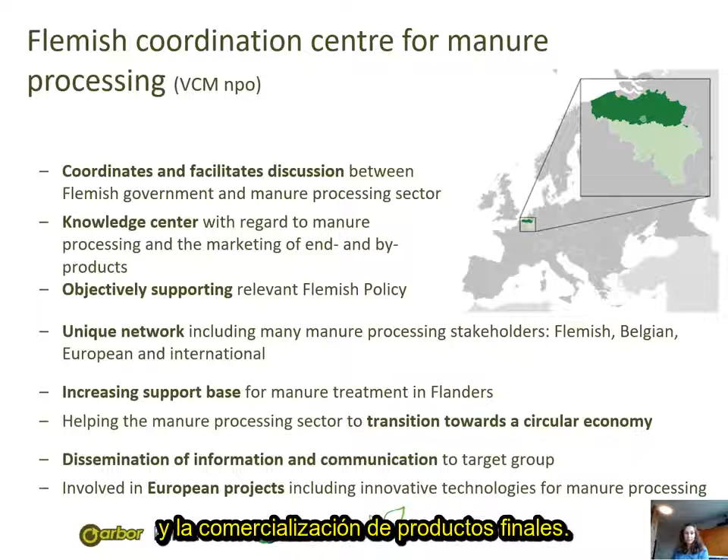A few words about our organization. We are located in Belgium, in the northern part of Belgium, Flanders, which you can see on the map. We try to coordinate between the Flemish government and the manure processing sector because we have a lot of manure in Flanders. On a small surface, you can imagine that this brings along some problems. We want to be a knowledge center with regard to manure processing and marketing of the end products. And we try to objectively support the Flemish policies around this.

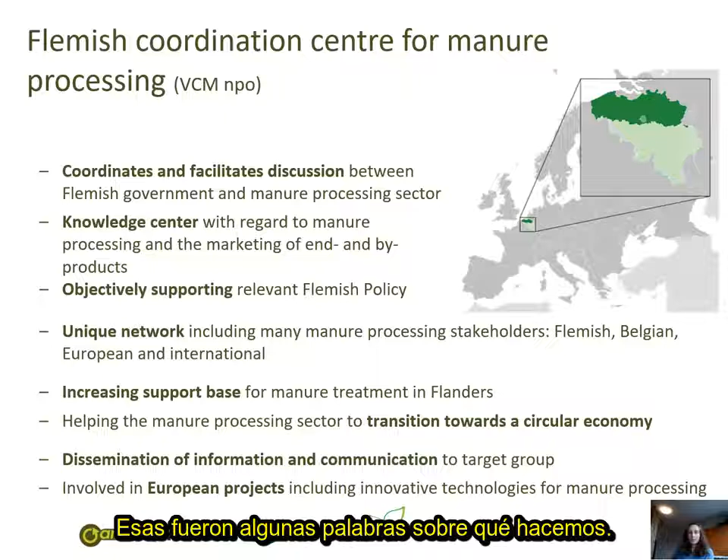We have a unique network of stakeholders in the whole of Europe, and we also hope to increase the supporting base for manure treatment in Flanders by helping the manure processing sector transition to a more sustainable and circular economy. That's why we try to disseminate as much information and communication as possible to our target group of farmers and manure processors. We are also involved in European projects, like SYSTEMIC, because we are looking at how to be a sustainable and advanced circular economy in our sector. So this is a small word about what our organization does.

Now, we also organize an international conference on manure management and valorization, which many times includes anaerobic digestion because it can also be seen as a form of processing manure. Not really processing, but treating manure and trying to recover energy from manure.

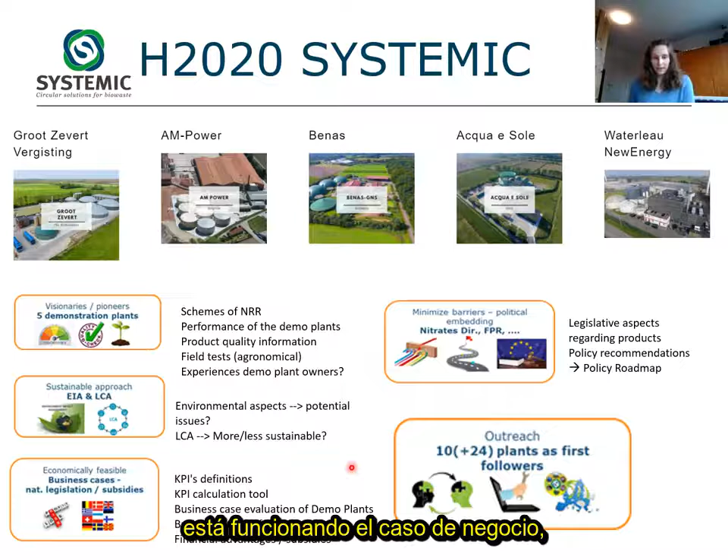So we focused on these 5 big plants in different regions, and for these plants we were studying the whole schemes of nutrient recovery that they have installed. These 5 plants have installed nutrient recovery technologies for digestate. We have been doing mass balances and energy balances for those 5 plants, also LCAs, so life cycle assessments. We have been trying to figure out how their business case is working, and also to see what the policy and legislative barriers are in the region, but also in the whole of Europe.

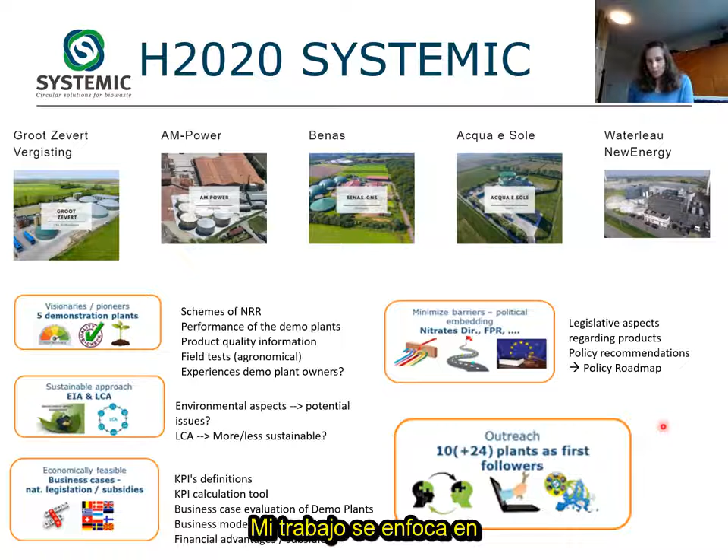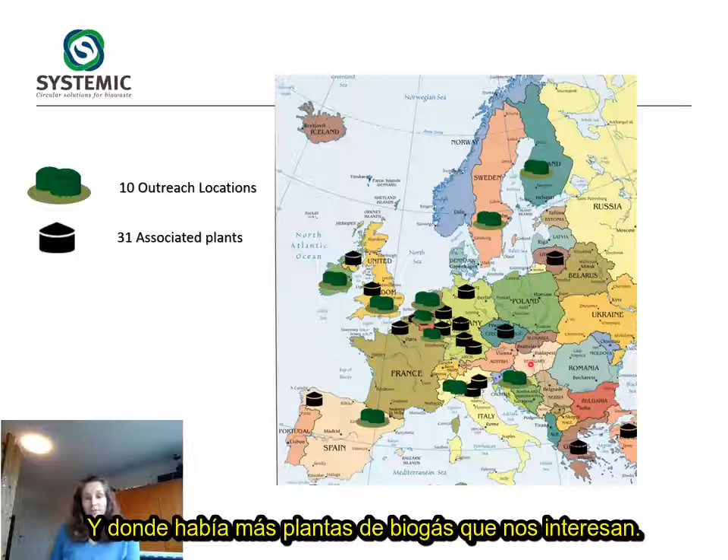My work package was focusing on transferring the technologies that they have implemented to more biogas plants in Europe. And how do we do that effectively? So we gathered 10 extra biogas plants that were very interested in the technologies to recover nutrients and water from digestate. These would be our outreach locations to which we would like to transfer our experience and knowledge. And then there were even more biogas plants that were also interested. So these were like our first followers.

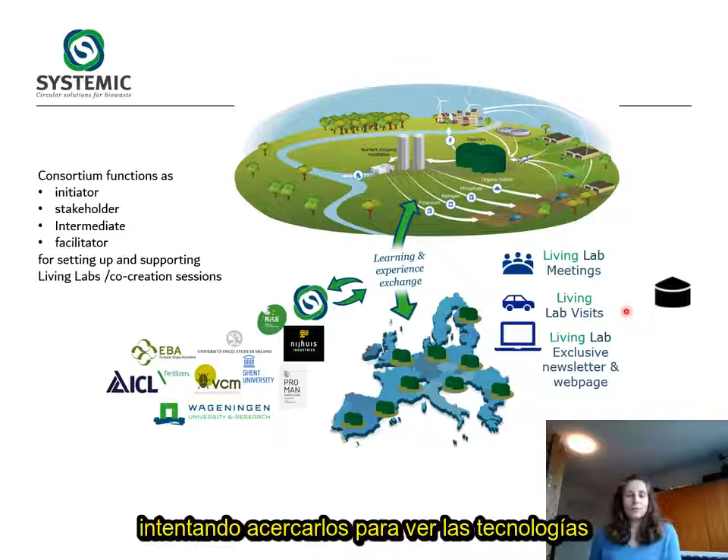The idea was that the SYSTEMIC consortium of partners would function as an initiator, a stakeholder, but also an intermediary or facilitator supporting this learning experience and exchange about nutrient recovery from digestates. How did we do that? We set up living lab meetings, which were meetings with all the biogas plant owners discussing these technologies and their experiences with them, trying to get them to visit each other to really see the technologies, and then having a digital part where they could also find all information. So that's about SYSTEMIC for now.

What I learned about the situation in Argentina from the DIVICO project is that there were about 100 biogas plants in 2015. Most of them were there because of environmental aspects, and only a small part was there because of the energy production they could get from anaerobic digestion. Most of them are small scale, and they mainly process industrial waste, organic waste, or biomass.

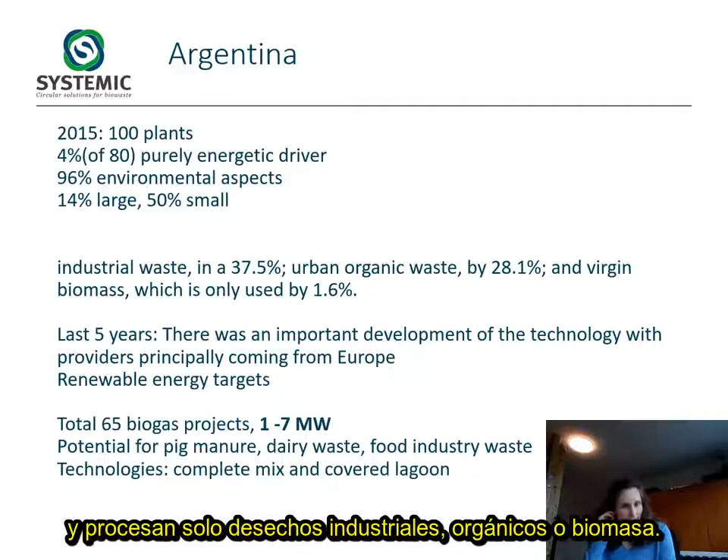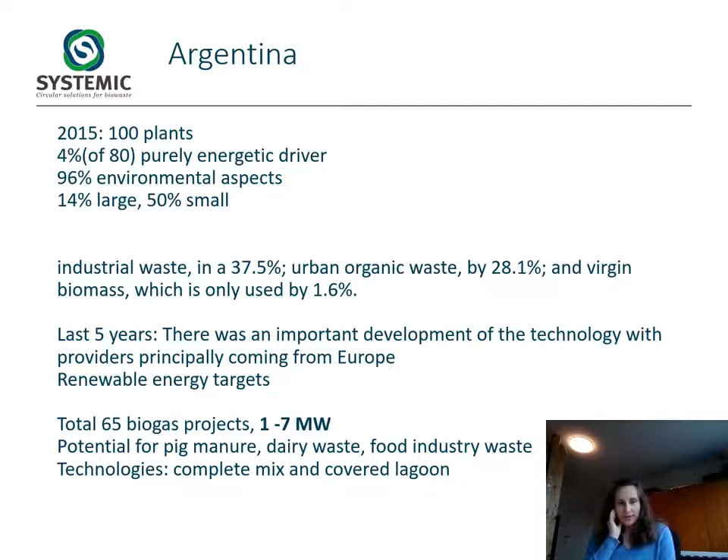But in the last few years, apparently, there was an important development in technology providers from Europe, and new renewable energy targets were set, so the biogas sector was more stimulated. And they have seen new biogas projects coming up in Argentina, large biogas projects with 1 to 7 megawatts production capacity.

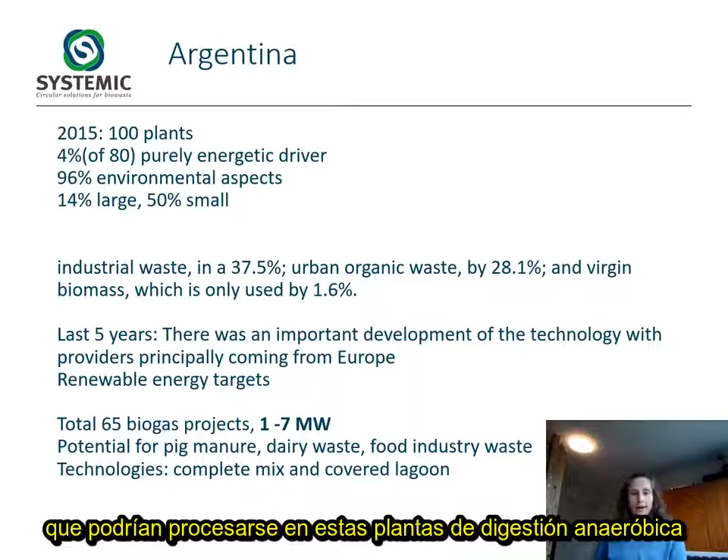And there is also a potential for the feedstocks, like there is enough pig manure, there is enough dairy waste or food industry waste that could be processed in these anaerobic digestion plants and valorized in the form of energy. However, the current technologies for digestate treatment are just complete mixing or just store it in covered lagoon and apply it on land.

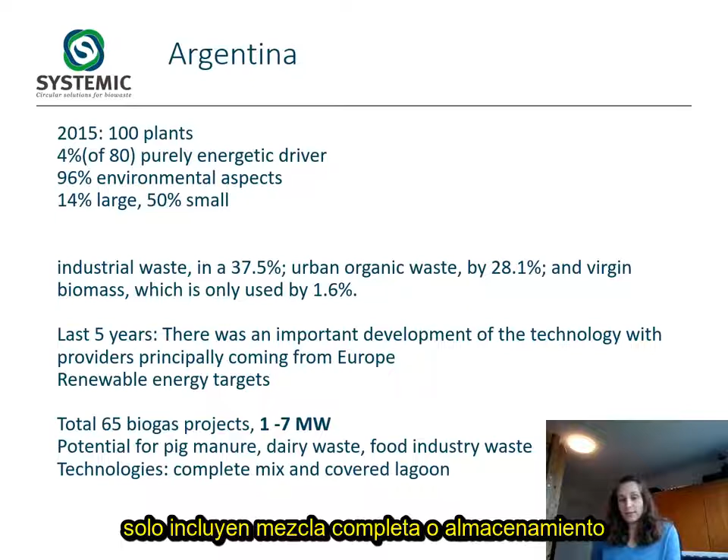Now, what are the problems or the conditions in Argentina? There is enough land, so we cannot really compare it to Europe, where we have very lower surface to spread all the digestates. In Argentina, there's no problem. There is enough land and there are no restrictions on nutrient surpluses in the soils, which is of course a good thing. However, there is a question about how to apply digestates.

Application methods cannot compact the soil, or there should be no tillage. It would also be beneficial if there could be a reduction of emissions of NOx and ammonia while applying the digestate as a fertilizer. And also reducing transport cost is an important factor, because when you're working with digestate, this is like a liquid product. You don't want to transport it too far, because transporting water is just a waste of money.

And also there could be in the near future or in the further future a potential market which could bring revenues, a potential market for like specific organic fertilizers made from digestate or for digestate as such. So this needs to be further developed first. Then there is a question about using separated digestate as bedding material for cows, and if the heat from the CHP could be optimally valorized. So these are all things we need to take into account when looking to the biogas sector in Argentina and trying to implement technologies for digestate processing.

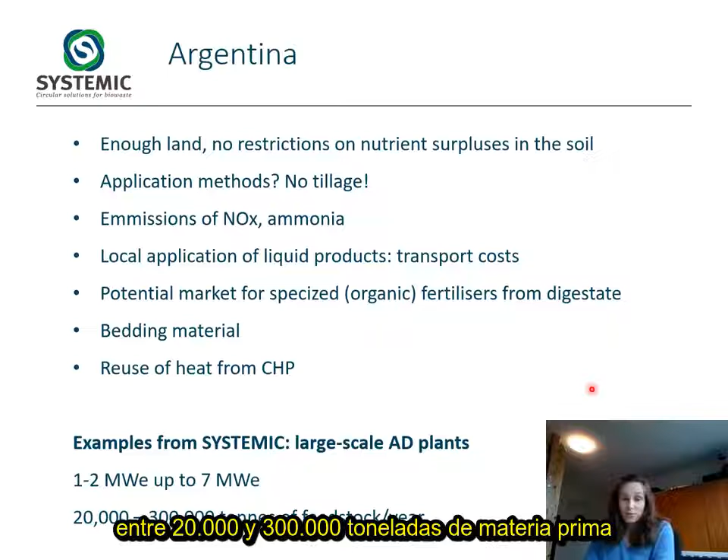I will now try to give you some examples we have from the SYSTEMIC project, which is on European scale and on European level. Maybe not everything is comparable to Argentina. However, the idea is just to give you some inspiration on what is possible. So in Europe, and in the SYSTEMIC project specifically, we have studied large-scale anaerobic digestion plants. Most of them were from 1 to 2 megawatts electricity production capacity, and there are even some higher that could produce up to 7 megawatts electricity. This translates roughly to 20,000 to 300,000 tons of feedstock going into the anaerobic digester per year. So then you have more or less an idea of what I mean with large-scale anaerobic digestion plants.

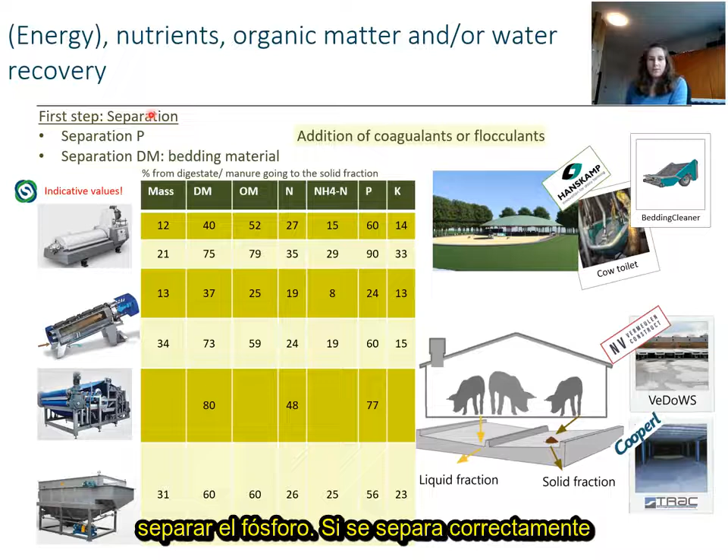Now, the first step to recover energy or nutrients, organic matter, and water from digestate is separation. Because then you separate the water fraction from the solid, the dry mass. And an advantage is you can also separate phosphorus. If you efficiently can separate dry matter like fibers, you can use this as a bedding material. At least in Europe, it can be used under the condition that it is pasteurized, which means that it stays 1 hour at 70 degrees.

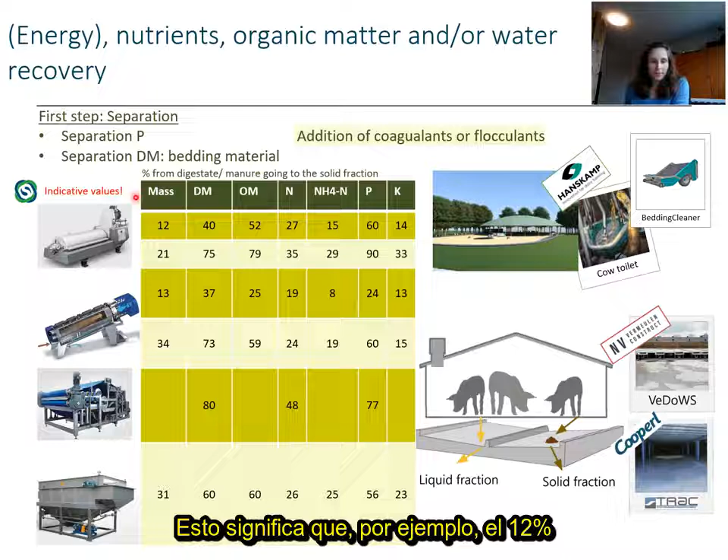So these are some indicative values of what different separation technologies can do for digestates. First thing you see here is the decanter centrifuge, which is mainly used for digestates in Europe. And these values are separation efficiency going to the solid fraction. This means, for example, 12% of the mass of the initial digestate is going to solid fraction. And here you have dry matter, organic matter, total nitrogen, ammonia nitrogen, phosphorus, and potassium.

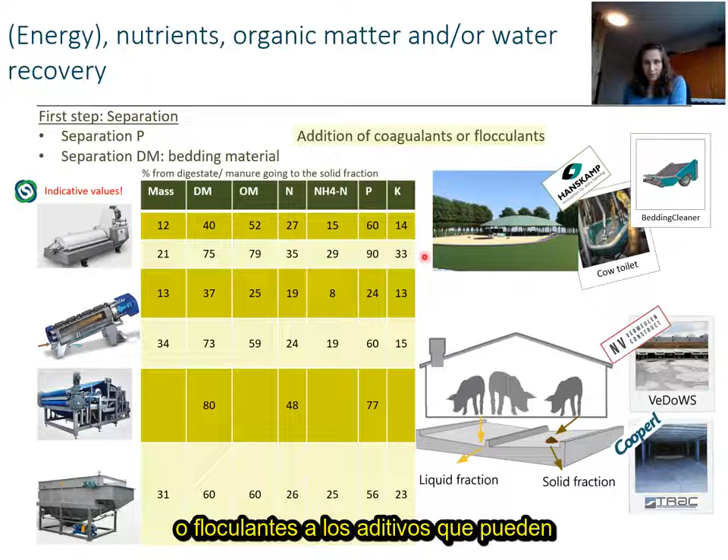The other column is the efficiency you get when you add coagulants or flocculants, which are additives that could help or support your separation. In Flanders or in Europe, in certain regions, it's important that you try to recover the phosphorus in the solid fraction, and therefore you see here that you would like to have as much phosphorus in the solid fraction as possible. Therefore, applying coagulants or flocculants can really help you with that.

The second one is a screw press, which is more used on, for example, more fibrous digestates or cattle manure, because it works better when there's more dry matter. This is mainly used, for example, for making bedding material for cows.

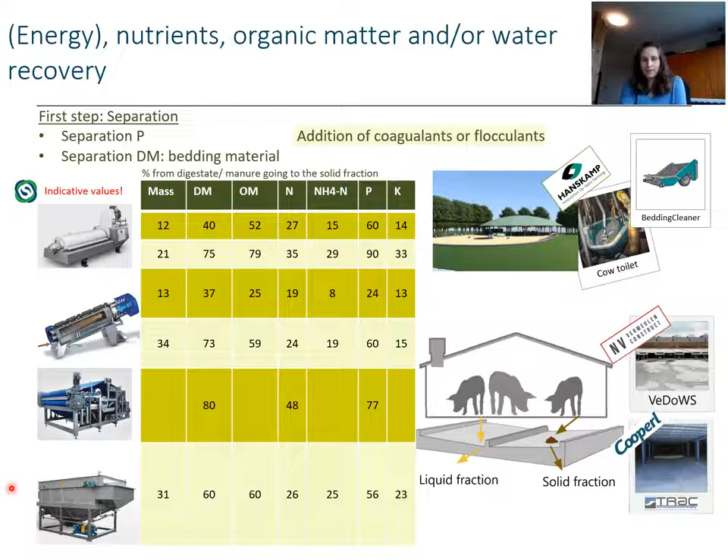Then you have a belt separator, which are belts moving along a row of rollers, and they are pressing the liquid out. This is also always used with coagulants. And then there is a DAF, a dissolved air flotation unit, which is more like the second step of separation. It's to get out more of the solids if you want to go further in purifying your digestate. So it's not like it's the first step. You can have, for example, a centrifuge and a DAF, and then a further treatment cascade.

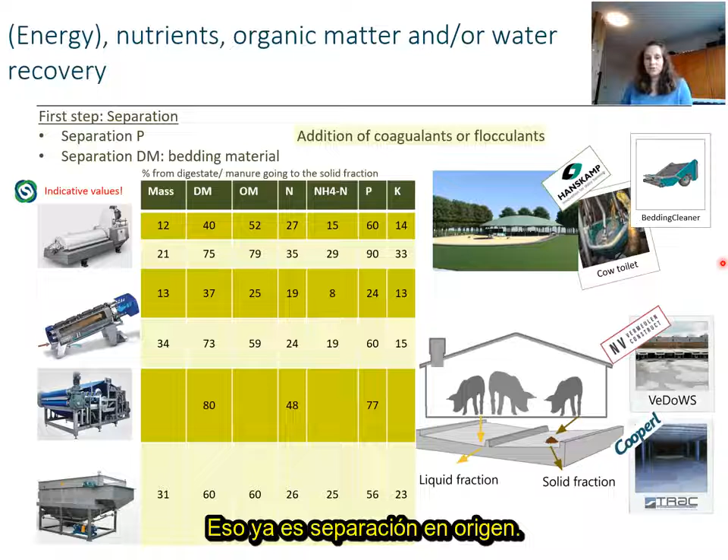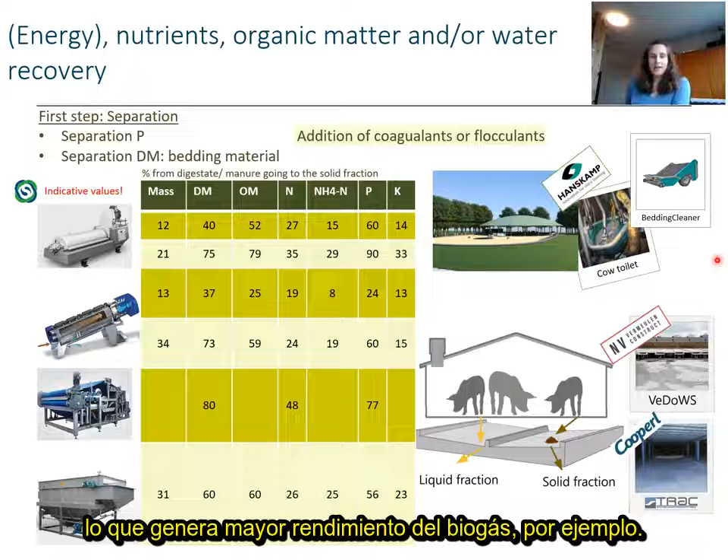These things here on the right are some specialties. This is separation in the stables already of manure, so it's even before anaerobic digestion. It's to separate the urine from the feces of the animals so that it's already at source separation. This can help with improved anaerobic digestion, for example, because then you only put the solid fraction in your digester, which gives you better biogas yield, for example. But these are very specific stable systems, of course.

Now, a small overview of what I just mentioned in my slide about which things should be taken into account for the products that are coming out of the separation technologies. We call it solid fraction and liquid fraction. Okay, if you would see the separation technology, is it complex? No, it's relatively easy to operate and to maintain. It's just a screw, or a decanter centrifuge is just a tumbling chamber. So it's relatively low in complexity.

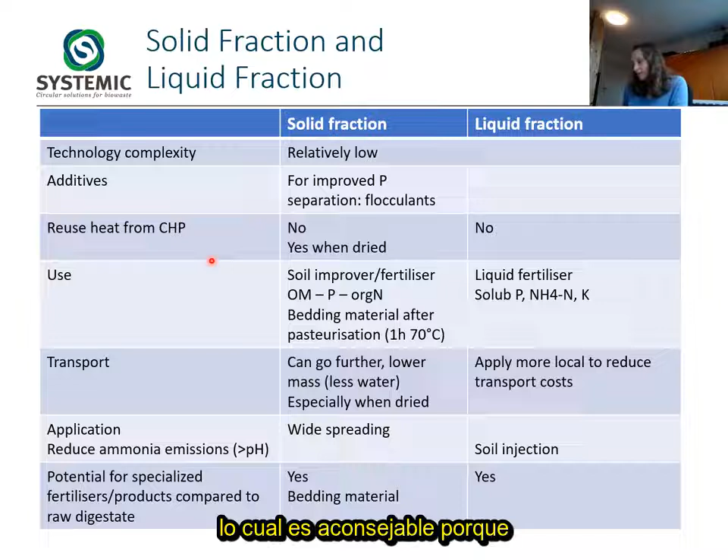You can use additives, like I mentioned, for improved phosphorus separation, for example, but it also counts for an extra cost, obviously. And you add chemicals to your digestate, which is also not always wanted. Can you reuse heat from the CHP? No, not for the system itself, because it doesn't require heat. It can when you want to dry your solid fraction after, which is advised because then you lower the volume or the mass even more of your solid fraction, and then you get a dry product up to even 90% dry matter, which is really, really dry, and it can be spread very easily. So drying can be interesting, and you can reuse the heat.

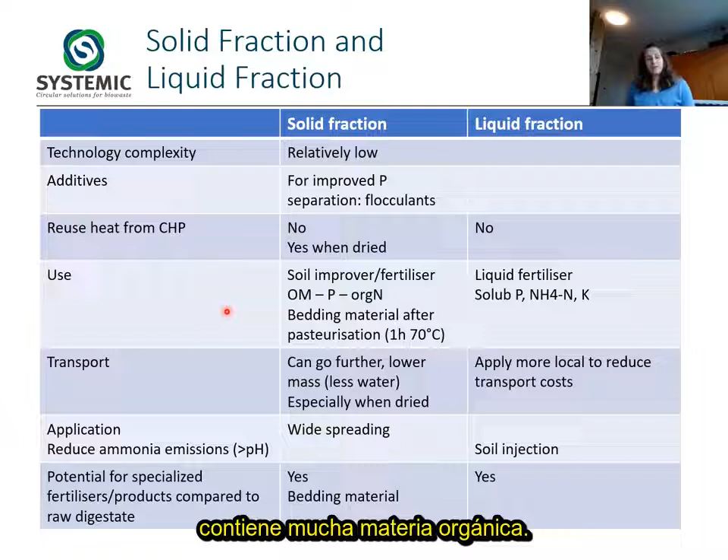How do you use these products, solid fraction and liquid fraction? The solid fraction can be used as a soil improver, for example, or fertilizer, because it still contains a lot of organic matter. Almost all the organic matter goes to the solid fraction. All the phosphorus is also linked to the organic matter, let's say the main part of the phosphorus, and organic nitrogen also stays in the solid fraction. Like I said, solid fraction can be used as bedding material, but after pasteurization, then it's rather safe to be used as bedding material for cows.

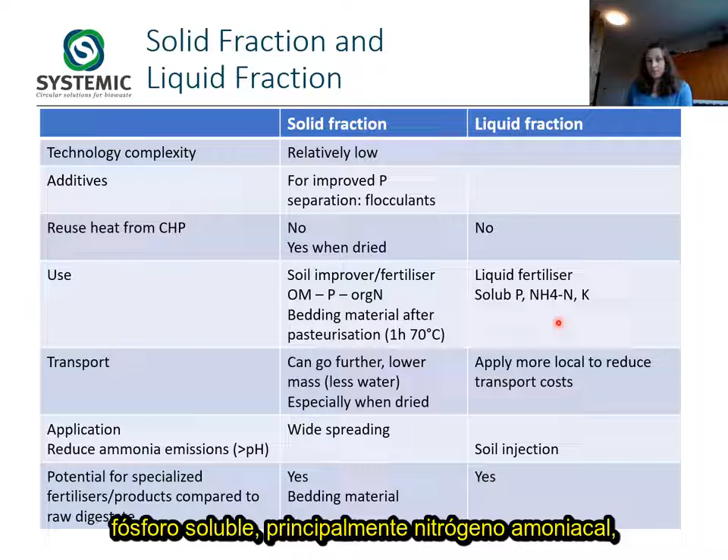Then the liquid fraction, it is a liquid fertilizer. It contains still a lot of nutrients and organic matter, soluble phosphorus, mainly the ammonia nitrogen, and potassium and other dissolved elements. So it's a good fertilizer, and it has an effect on, for example, here the transport. The solid fraction, you can obviously go further with it because it has a lower mass. It's also drier, so you can drive it away further at lower costs. Liquid fraction would be advised to apply more locally because transporting water is just an extra cost.

Application. When it's a dry product, you can just spread it widely with a normal spreader. For liquid fraction, it's advised to do soil injection because then you really reduce the possible ammonia emissions coming from the liquid fraction.

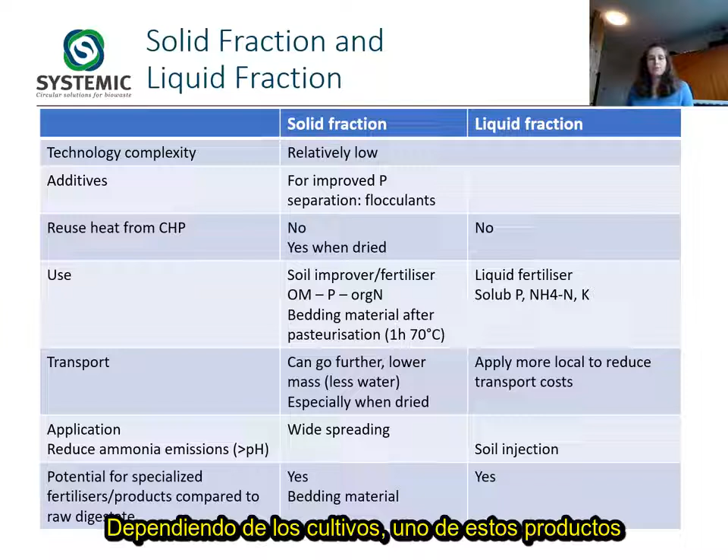Is there a potential for specialized fertilizers from these products compared to raw digestate? Yes, because here you have more or less concentrated nutrients in the solid fraction, meaning phosphorus is concentrated, organic nitrogen is concentrated, and organic matter. So this is a very nice product compared to digestate because it doesn't have that volatile ammonia, or not much, and the liquid fraction is the opposite. It has this readily available nitrogen in a liquid. So depending on the crops you're cultivating, one of the two products could be even more interesting than raw digestate.

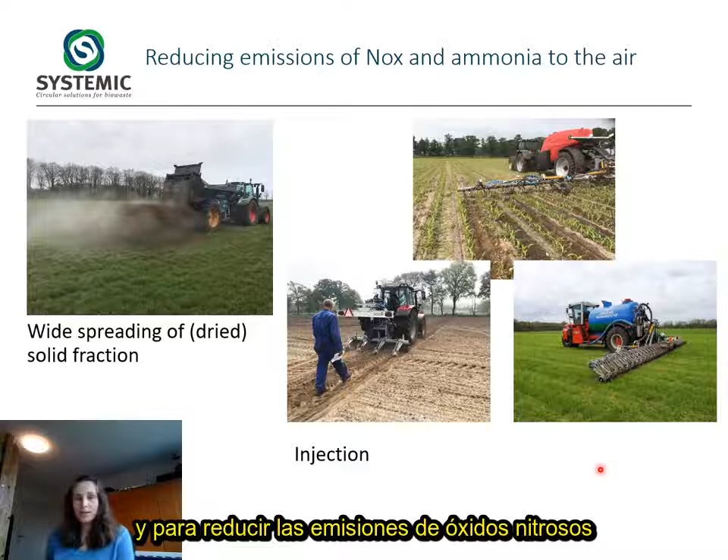Something about application technologies. This is a picture of wide spreading of dried solid fraction. For example, injection technologies. These are different types of machines that are used in Europe to inject liquids into the soil for crop cultivation and to reduce NOx and ammonia emissions to the air.

Afterwards, they have membrane filtration units, microfiltration, and reverse osmosis. And then they have an ion exchanger to really purify the water into clean water that can be discharged. What is coming out is a concentrate. They call it concentrate, but it's actually not really concentrated. It's a liquid with mainly all the nutrients in it.

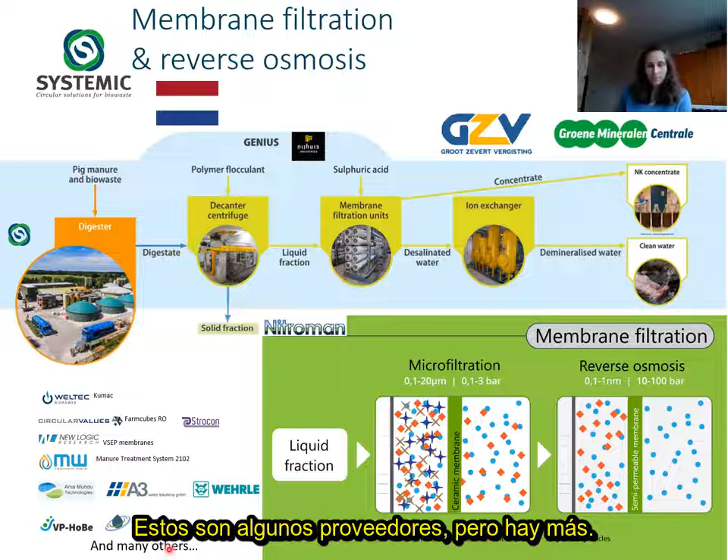Here you see a scheme of what the membranes do. So they just keep all the macromolecules and salts, retain them, and only the purified water goes out. These are some suppliers, but of course there are many more.

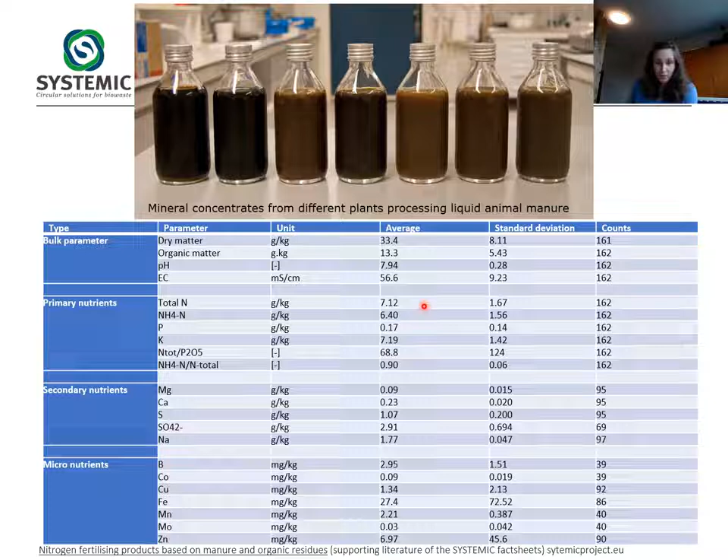And this is a rough estimation of the composition of the mineral concentrates. That's how they call it, but let's call it the RO, the reverse osmosis concentrate. You can see that the pH is rather high, up to 8. And I call it concentrate, but it's not really concentrated because, for example, the nitrogen content is only 7 grams per kilogram. So it's like a very diluted nutrient solution, let's say.

Pros and cons of the different products. The technology complexity. I'm talking now about the whole cascade, microfiltration, reverse osmosis, and ion exchange after each other. It's quite complex to operate, and it's also really sensitive, especially the reverse osmosis unit. You cannot go to it with a high dry matter content, otherwise it just clogs, and then you have to replace the membranes, which is an additional cost.

So you have to have staff that's really experienced, that needs to get the feeling how these technologies are working and what can disturb them. You have to have a stable process also in your digester, because fluctuations can really foul the membranes, for example. And therefore an advanced pre-treatment is needed.

And I'm thinking here about a very good first step. Like I mentioned, the separation should be very robust. You would have a constant end product. So the liquid fraction after separation, which is going into your membranes, should be rather constant of composition to have no problems in later steps. So this has an impact on maintenance and operational costs, as you can imagine.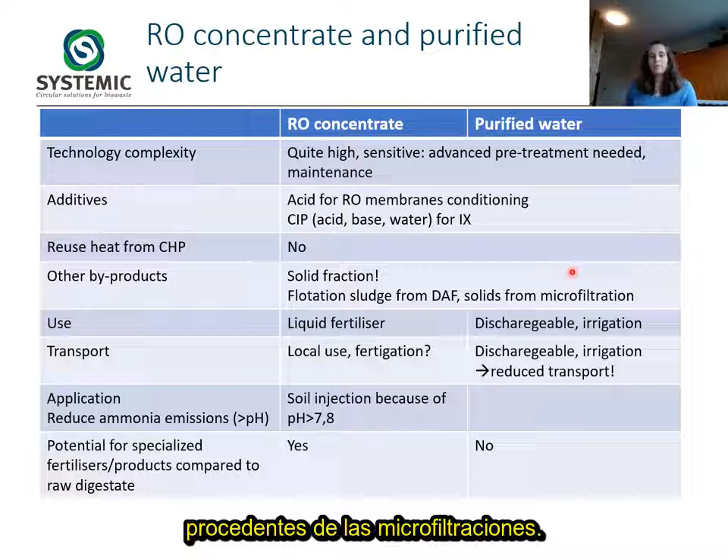You can recirculate it back to the digester, or you can mix it with your solid fraction, but you still need to do something with it. And then there's a certain amount of solids coming from your microfiltration too. So be aware that these are not the only two products that are coming out of this cascade.

On the other hand, what can you do with this product? The reverse osmosis concentrate can be used as a liquid fertilizer because, like I said, it contains all the nutrients and water. And then the purified water, it is dischargeable, or you can use it as irrigation water. And as you can imagine, the RO concentrate has a much lower volume than the initial digestate, so you win in volume. It's maximally reduced and it's concentrated in a much smaller form. However, it's still a liquid.

So for transport, because it's a liquid, try to use it locally or as fertigation as much as possible. And the purified water, you can discharge it or also use it as irrigation water. This will, like I said, give you reduced transport costs compared to if you would have raw digestate.

How to apply this? The reverse osmosis concentrate needs to be applied with soil injection because, like I said, it has a higher pH which can volatilize the ammonia again, and then you have ammonia emissions. So reduce that, don't go wide-spreading everything or all the ammonia is just lost in the air. You get burning of the plants, etc.

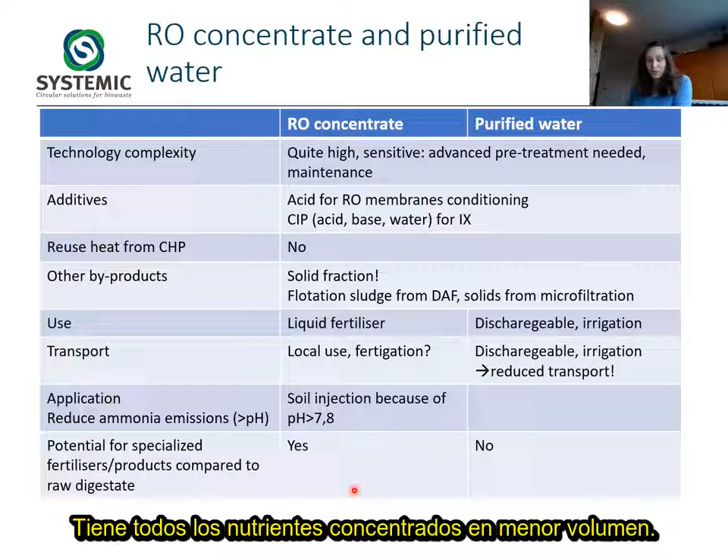Is there potential for specialized fertilizers? Yes, this is very much a different product than raw digestate. It's a more clear liquid. It has all nutrients concentrated in a smaller volume. So it is definitely a different product than digestate, which could be tailored to the needs of specific crops, for example.

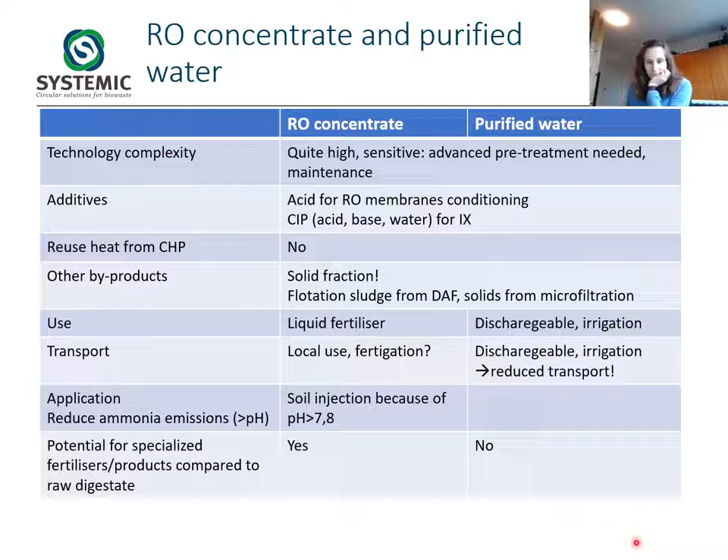Then there's ammonia stripping scrubbing technology, which might not be interesting for Argentina, but I can still mention it. It's a technology to get nitrogen out of the digestates or out of nitrogen-rich gas, like stable air, for example. What you do is you try to get ammonia in liquid or in gas into ammonia gas form, and this ammonia gas you then try to scrub away with acids and capture it in the liquid. The end product is an ammonium salt solution, and then you have a clean stream of air or liquid, relatively free from nitrogen, ammonia.

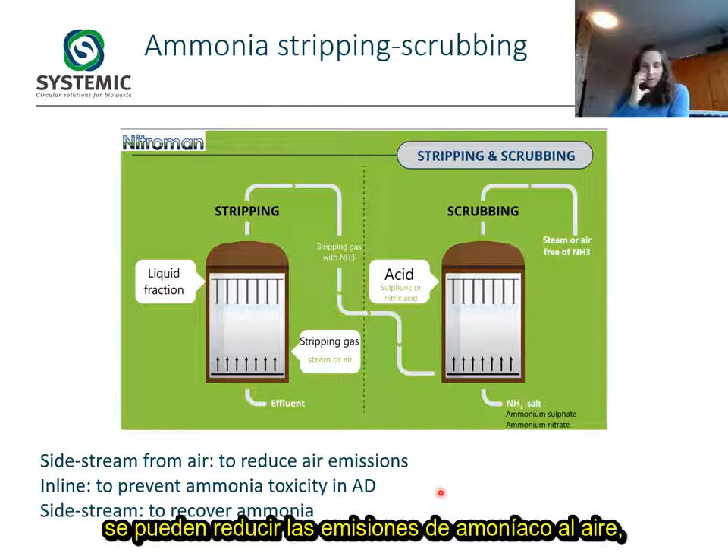These are different configurations that you can have. You can have side stream from air. So if you have nitrogen-rich loaded air, you can reduce ammonia emissions to the air by first scrubbing the ammonia out of the air. You can also put a scrubbing installation inline with your digester. This is mainly done if there are high amounts of ammonia in the digester because of the use of, for example, poultry manure. This brings toxicity in the digester and reduces the biogas yields. Therefore, if you strip and then recirculate the stripped digestate, you can have a higher biogas potential.

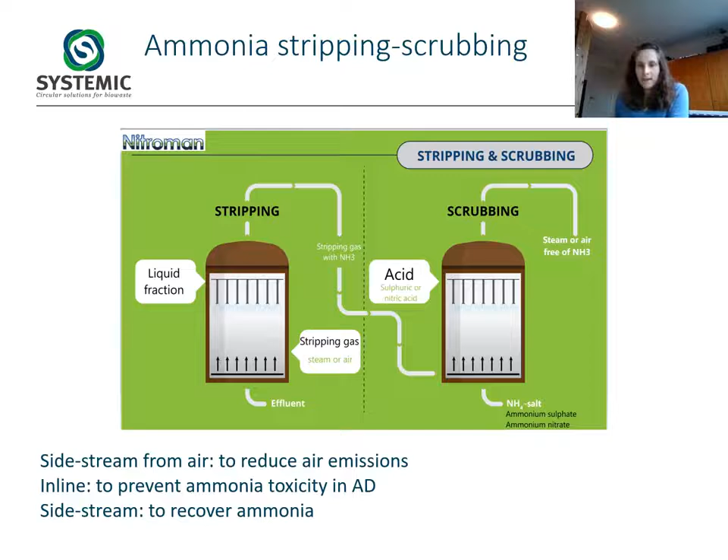And then there is also just side stream stripping, which means you take your digestate and you strip the ammonia from the digestate, and then you have a digestate low in ammonia and a scrubber salt solution. So that's just a way to recover the ammonia in a different kind of solution. I'll go a bit deeper into this. For example, this case here in Italy has an inline stripping scrubbing because they are using sewage sludge with high ammonia levels. It brought toxicity in their digester. They have a stripper here and they recirculate the stripped digestate back, and then they have higher biogas yields.

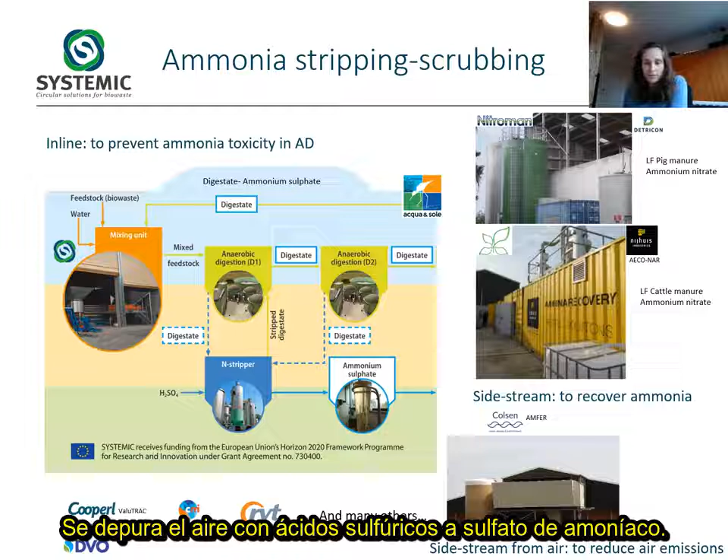These are two installations. One is here on the liquid fraction of raw pig manure, and they scrub the ammonia with nitric acid, which then produces an ammonium nitrate solution, and stripped pig manure. Same was tried for cattle manure. It was more difficult because there were more pre-treatment steps necessary. And then there is something that's done very frequently in Europe, which is air washing, meaning the air from the stables of the cows or the pigs is washed with more or less the same system so that there is no ammonia emission from the stables to the outside air. So there the air is scrubbed with sulfuric acid to an ammonium sulfate solution.

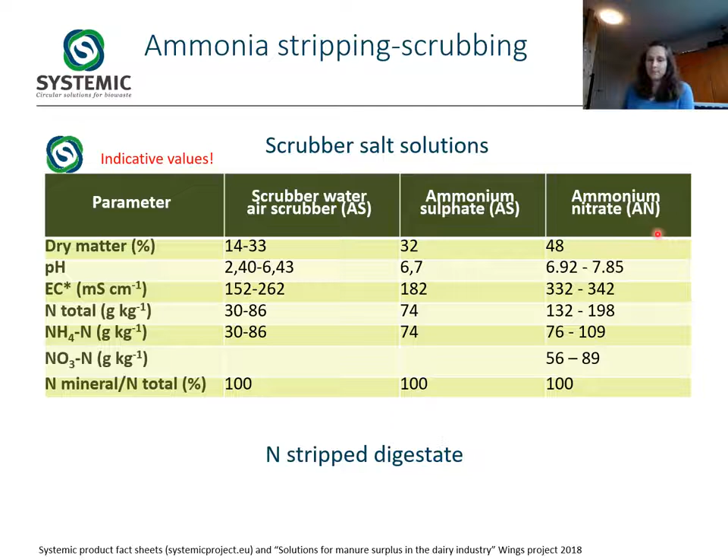Here are some indicative values of how these scrubber salt solutions look. If you have scrubber salt from an air washing system, these are the compositions. You can see that the pH is rather low and that the nitrogen is about 3 to 8% of the solution. If you have ammonium sulfate from raw digestates, more or less the same concentration. However, the pH can be a bit higher. Ammonium nitrate also the same, but you have higher nitrogen levels because you, of course, have ammonium nitrate. So you have twice the nitrogen here. You have also sulfur. The other product you get is nitrogen stripped digestate, so digestate with a low amount of nitrogen in it.

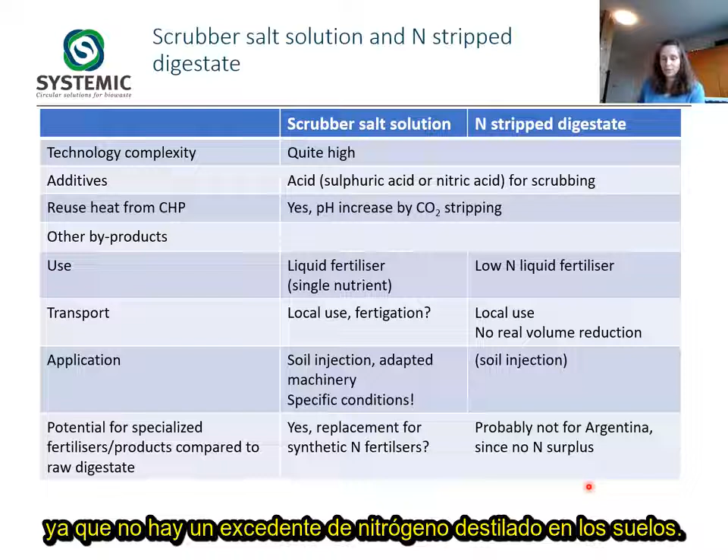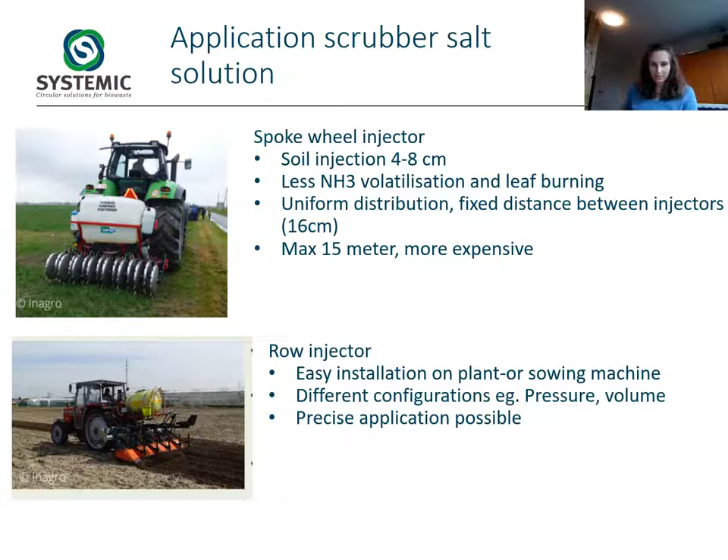These are some different technologies or machineries to apply the scrubber salt solutions. I'm not going to read this because I'm not really an expert on application machinery, but these are some things they used in Europe. Spoke wheel injection, row injector, and here you have trail hoses, drag hoses, which is

no injection. These are conditions you have to watch out with when you are spraying the ammonia scrubber salt solution. Because if you use it as a leaf fertilizer, you have to really watch out what you're doing because of the acid pH and the possibility of the volatilization of ammonia. You can have leaf burning, except under certain conditions when you can use it.

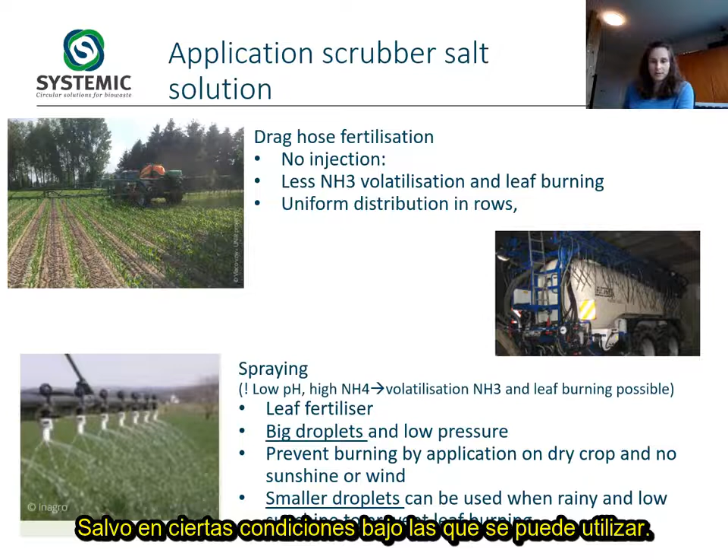There's a special system in Germany that does ammonia stripping without any use of acids. They use recovered gypsum, and this is their cascade. However, there's only one plant really operational now. The special thing here is that from the stripped digestate, they separate fibers and they make cardboard, paper from it. But therefore you need to have a very specific feedstock, with a lot of fibers, like with grass and chicken manure.

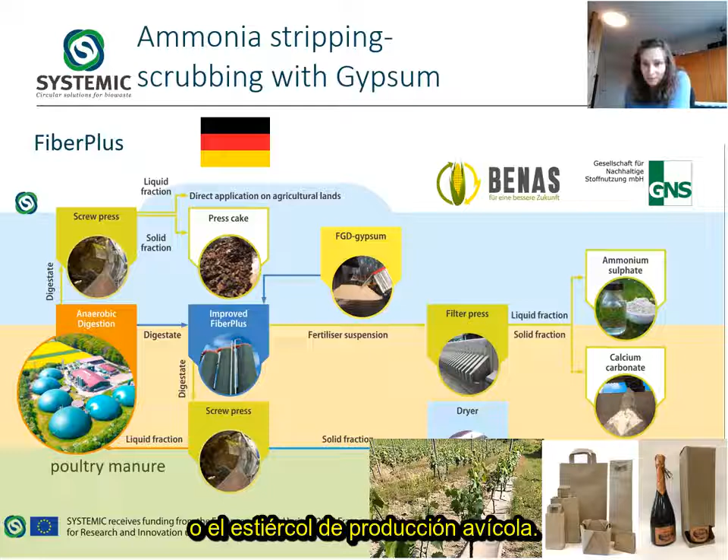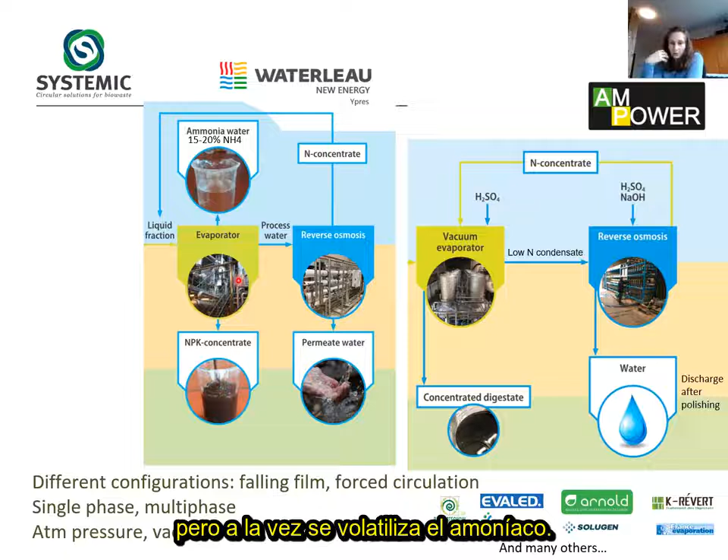Then the final thing I want to talk about is evaporation technology. It's also a way to reduce the volume of the digestates, and there are two ways you can do this. First of all, you have an evaporator, and if you just put in there liquid fraction of digestates, it evaporates water, but ammonia also volatilizes, so you get an ammonia water solution when it condenses, and a concentrate of all the other nutrients and organic matter.

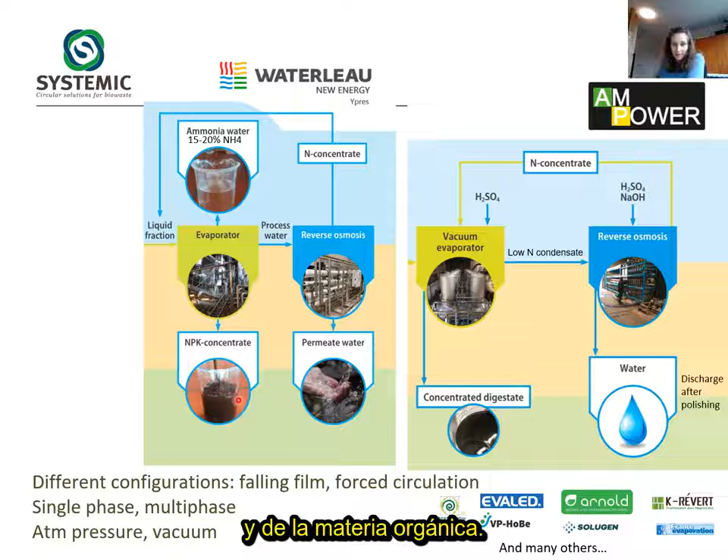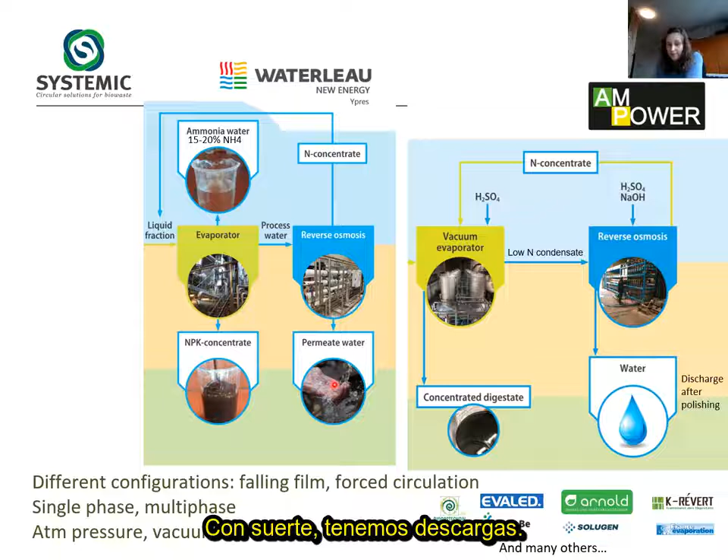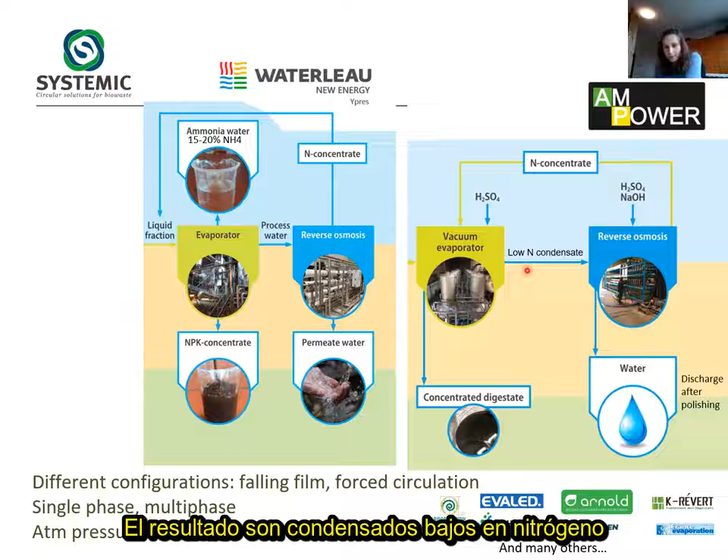So like you see here, you get ammonia water of 15 to 20% of nitrogen ammonia. And then you have processed water, which you can purify further and hopefully discharge. So you have the reduction of volume there. Another way, if you want to keep the ammonia in your concentrate, is just add some acid, and then everything is in the concentrated digestate. And what comes out is a very low nitrogen condensate, which you can further purify and discharge. So this is a way to really reduce the volume by extracting water from your digestates.

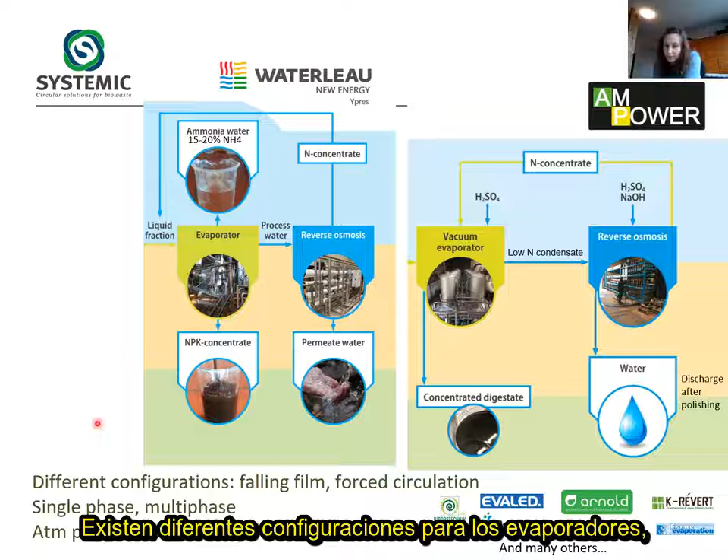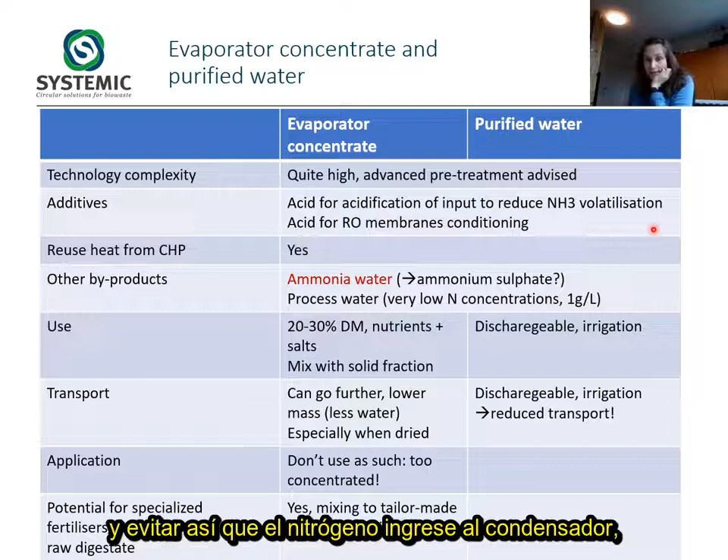There are different configurations for evaporators, so be aware that it's very complex technology and you need an advanced pre-treatment, because the higher dry matter or the higher organic matter you send into your evaporator, the less efficient it will work. You also need additives for acidification of your digestate if you want to prevent nitrogen from going into your condensate, or for conditioning of the reverse osmosis. You can obviously use the heat from your CHP because you will need to heat up the evaporator.

Make sure you know you are also producing other products than just concentrate and purified water. You are also making, in the first case, ammonia water, which is not a nice product you want to have, which is just ammonia dissolved in water, and it has very high pH, so you cannot do anything with it except trying to convert it to ammonium sulfate maybe. It can be used as an NOx reagent in incineration ovens, for example. So if there's an incineration plant nearby, you can use this as an alternative for ammonia solution or urea solution, for example. However, it's a high-risk product, so be aware.

And you will also have some processed water, which still contains low nitrogen concentrations. So it's not just able to be discharged. This makes maybe in total this process not always interesting, but you need to see for your case, for your biogas plant, if it's interesting or not. How can the products be used? The evaporator concentrate is like 20 to 30% of dry matter. It contains all nutrients, all salts, which means it's a very concentrated, salty product, not comparable to digestate.

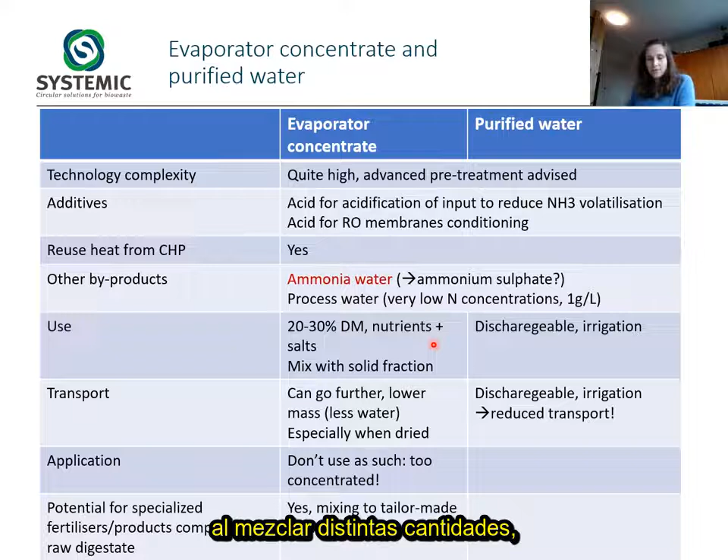What can you do with it? You can mix it with your solid fraction and dry it. And then you have a specialized fertilizer, with which you can play with the nutrient content by mixing different amounts. And the purified water, of course, you can discharge it or use it as irrigation water. Transport: if it's a dry product, you can transport it further because you have lower mass.

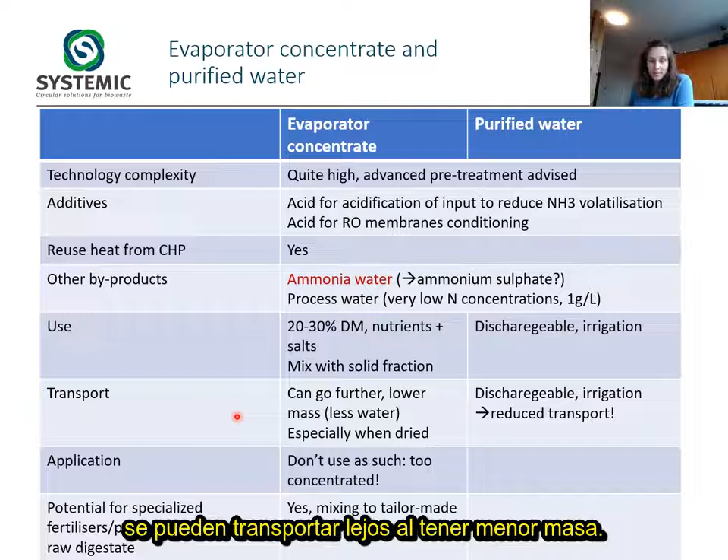The purified water, as I said, can be discharged, and the evaporator concentrate, don't use it as such as a fertilizer because it's too salty, too concentrated. Like I said before, mix it with other fertilizers, with solid fraction of manure, with solid fraction of digestate, so you can have more or less a tailor-made product.

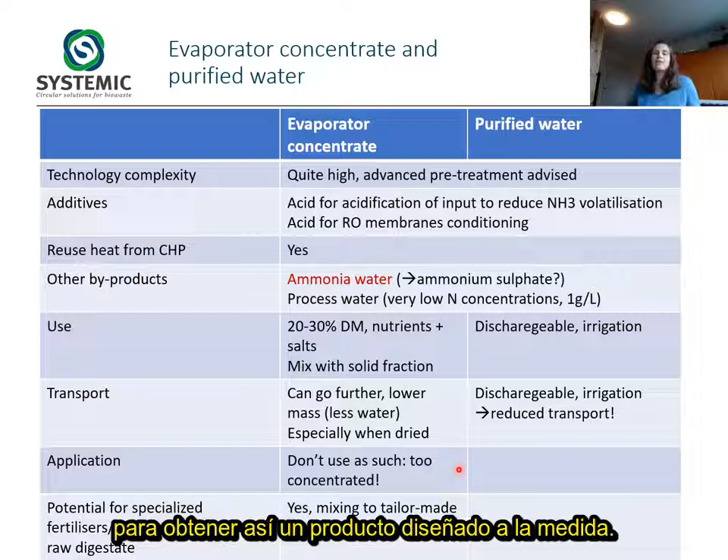Preferably dry it, pelletize it, then you have this specific fertilizer. Now, a small thing about the revenue potential of these new products as specialized fertilizers. These are all relatively new, unknown products. Even digestate as such is a new product for a lot of farmers. But we see that there could be an interesting untapped revenue potential for all these products.

What can you do? First of all, the low-hanging fruits are making blends of the different nutrient compositions. So taking ammonium sulfate, try to mix it with solid fraction so you can really tailor the NPK value of your fertilizer towards the needs of certain crops. The second option is going into niche markets, which I will give a bit more information on later.

Currently, apparently in Argentina, there's no culture yet of using digestate or digestate-derived products as a fertilizer, which could be a bottleneck. That is because the farmers are not familiar with specific application methods and they don't know the product yet. They don't trust it yet, maybe. So what do you need to do first? First, try to optimize your product towards the needs of a defined consumer group.

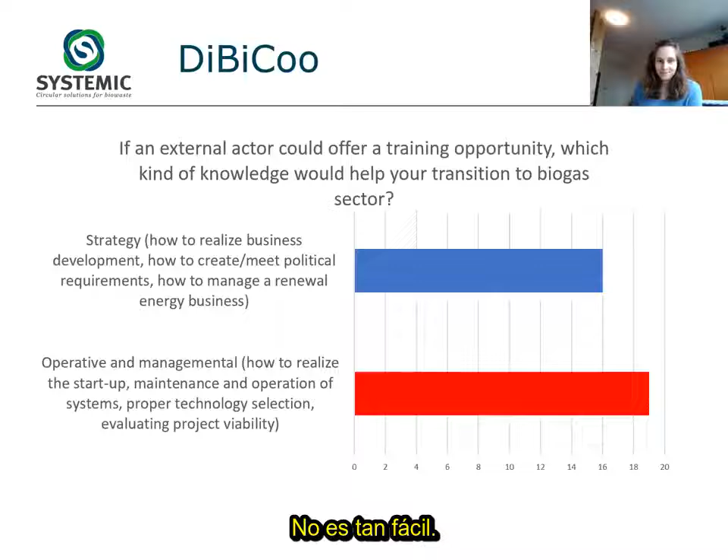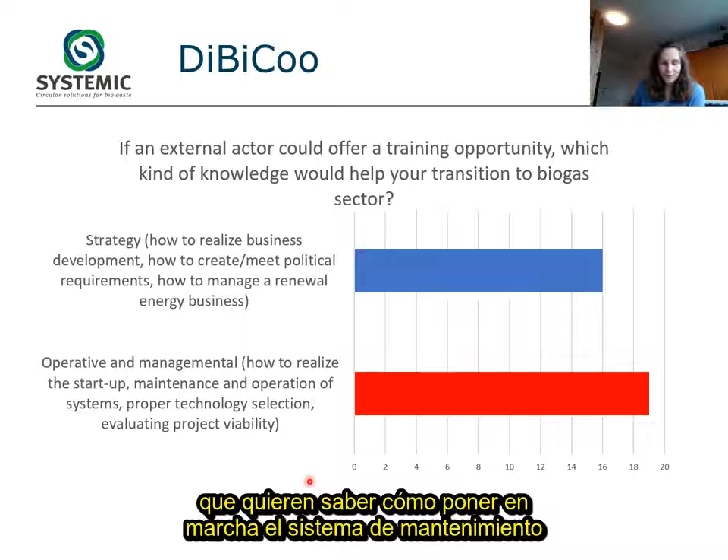Something from the DiBiCoo project, from their survey. What are biogas plants in Argentina looking for when they are looking for training opportunities? Here a lot of them said, although it's more or less 50-50, we want to know about start-up, maintenance, operation systems, proper technology selection. So this is what I remembered from this survey.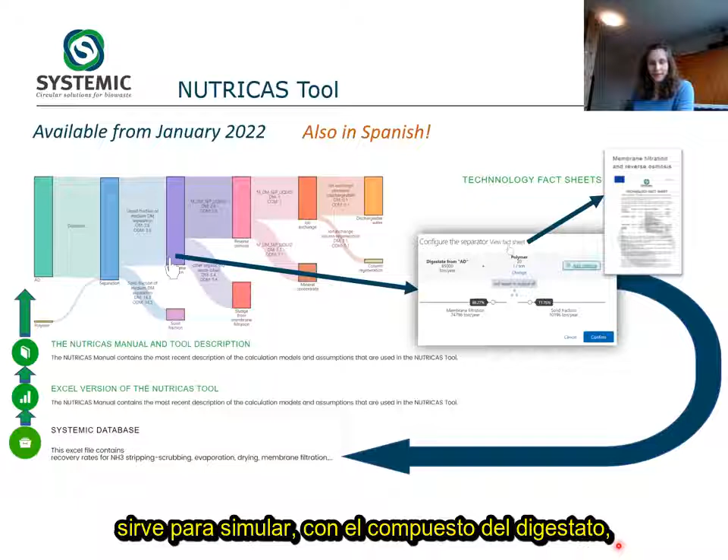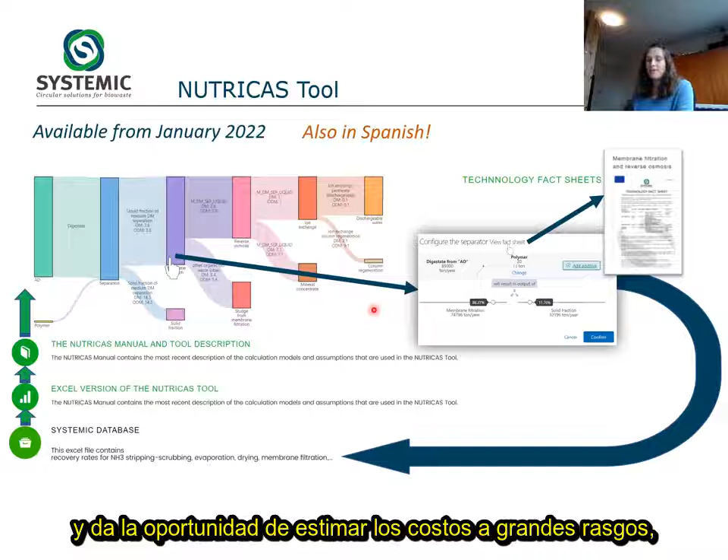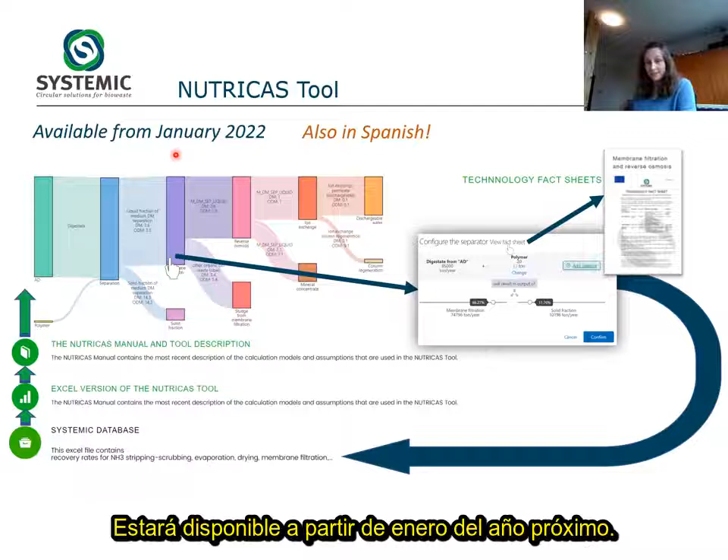This is a short thing about the tool we have developed. Like I said, it's a tool with which you can simulate, with your own digestate composition, which product would come out. So it's mass balances, and it also gives you the opportunity to estimate very roughly the costs, the investment costs and the operational costs. And there are a lot of information sheets available too. It will be available from January next year, and there will also be a Spanish version, which could be useful.